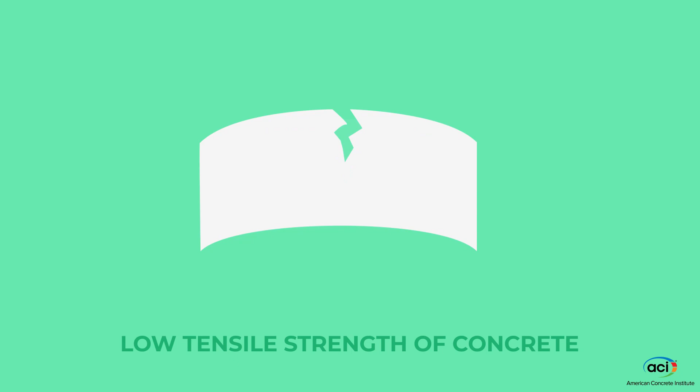This could be resolved by using a material with greater tensile strength and adequate ductility, but such a material is typically more expensive. So there is a need for a cost-effective material which has higher ductility and tensile strength.

ECC, Engineered Cementitious Composites, also known as bendable concrete and initially developed by Victor Li in the 90s, is a novel material having excellent inherent ductility and improved tensile strength.

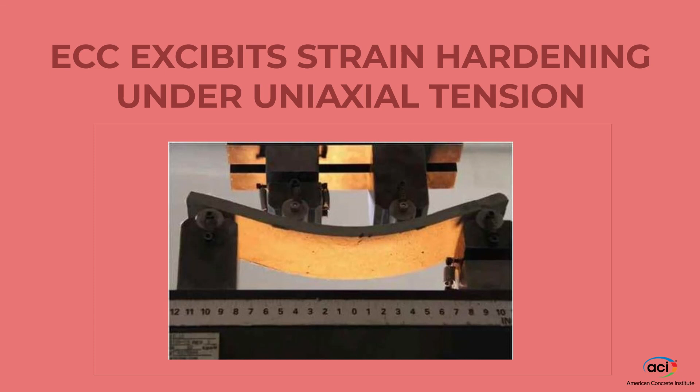ECC constituents are similar to those of conventional concrete, but with the absence of coarse aggregate and the addition of fibers. ECC exhibits strain hardening under uni-axial tension, which allows this material to bend and form multiple cracks over the entire surface instead of a single localized crack that could spell disaster.

The development of composites dates back to the 1990s, but surprisingly, despite their numerous benefits, we don't see many ECC structures around us. There are certain restrictions which limit the commercialization of ECC, mainly: complex material designing process and its unknown characterization and performance under real loading.

Material designing of ECC is quite complex and based on extensive experimentation. The major concern is to find out the critical volume fraction of fiber for any particular matrix. Critical volume fraction is the minimum volume of fibers needed to ensure strain hardening behavior. Different researchers have come up with different approaches to find this critical volume fraction.

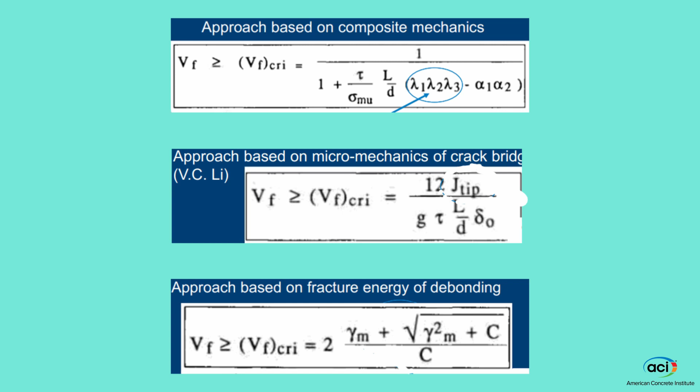These include a composite mechanics approach, a debonding fracture energy approach, and a micromechanics of crack bridging and fracture approach. These models provide simplified equations for finding the critical volume fraction, but the variables involved need to be found experimentally. For example, in the model based on micromechanics, we need to find the complementary energy of matrix fiber, a frictional bond, and snubbing coefficient, which makes this process quite lengthy, time-consuming, and uneconomical.

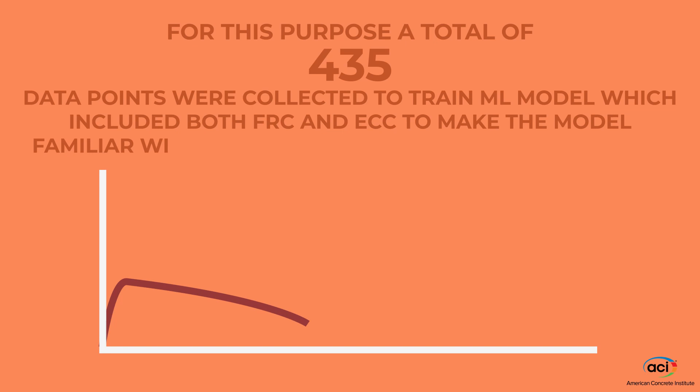The solution is to implement machine learning for material designing. For this purpose, a total of 435 data points were collected to train a machine learning model, which included both FRC and ECC, to make the model familiar with two different types of post-cracking behavior.

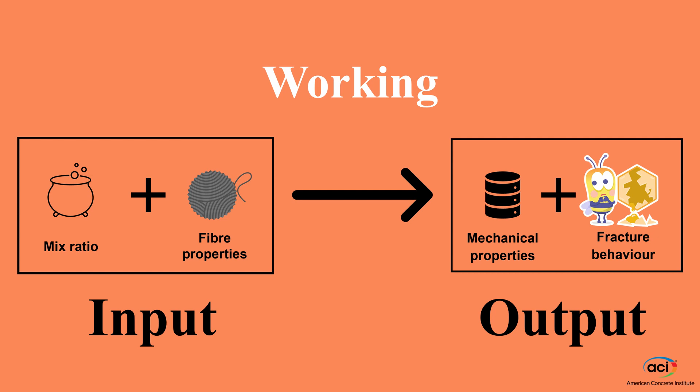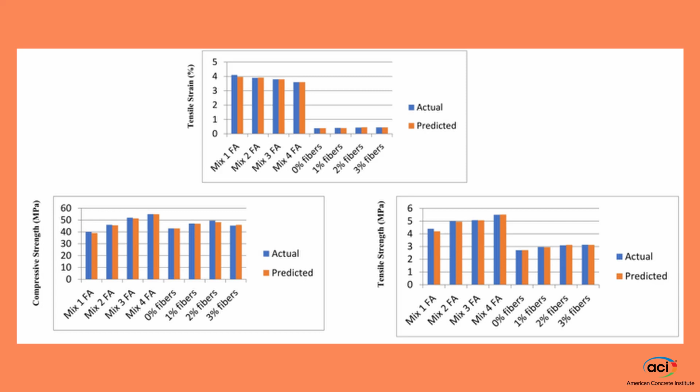The working of the model is quite simple. It will ask for mix ratios and fiber properties and will predict mechanical properties and fracture behavior of the resulting mix. Fracture behavior means whether the mix will give strain hardening or strain softening in tension. An accuracy of 98% was achieved using this model. In this way, even a layman can easily design a mix without any experimentation.

The second problem is to study the behavior of ECC at the structural scale. ECC possesses an excellent post-cracking response with increased capacity. Its behavior on material and member level has been widely studied using sophisticated FEA, but its structural response has not yet been confirmed. In our project, structural designing and performance-based evaluation of ECC structure was conducted considering realistic types of loading.

Incorporating dead, live, and seismic loads, the comparison between ECC and RCC is carried out to get the comparative idea of its design and seismic response. Total 3 models were developed for comparison: RCC with adequate cross-section, ECC with adequate cross-section, and ECC with same cross-section as that of RCC.

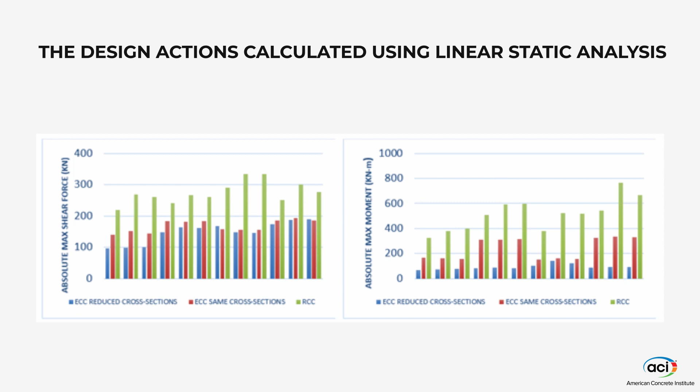The design actions calculated using linear static analysis were quite less for the ECC reduced cross-section model due to lower unit weight of ECC, which leads to less self-weight and lower inertial forces to develop within the structure.

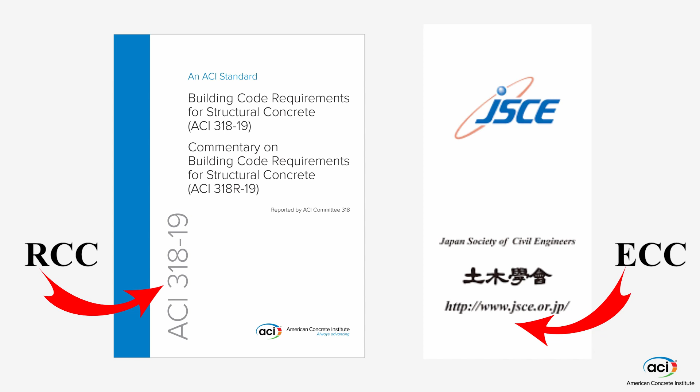For designing, ACI 318 was used for RCC while JSCE guidelines were used for ECC, using the design actions calculated from linear static analysis. The result showed up to 25% reduction in the cross-section and about a 30% reduction in steel requirement, which cut the total structural cost by 11.7%.

ECC is a novel material having a higher amount of ductility. Therefore, a non-linear analysis should be conducted to determine its actual seismic response. Also, JSCE guidelines for designing have no legal standing. Therefore, performance-based evaluation is performed to eliminate any uncertainty.

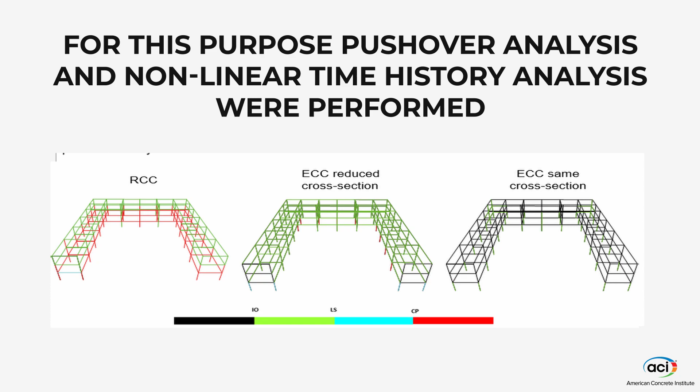For this purpose, pushover analysis and nonlinear time history were performed, which demonstrated that damages in the ECC structure were considerably lower as compared to RCC. The study concludes that irrespective of the additional per unit cost of ECC, on a structural scale, ECC is a cost-effective material with superb seismic performance.

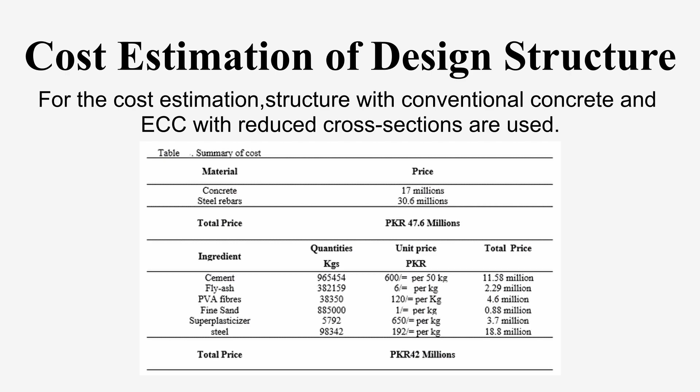In conclusion, these two studies are tiny steps towards the commercial implementation of ECC on a structural level. Using these studies, one can easily design the mix of ECC first and then proceed towards the structural designing, following the ISMD approach proposed by Li. Once deployed at scale, this beneficial material will save lives every day. Bendable but not beatable, ECC is the concrete we needed yesterday.